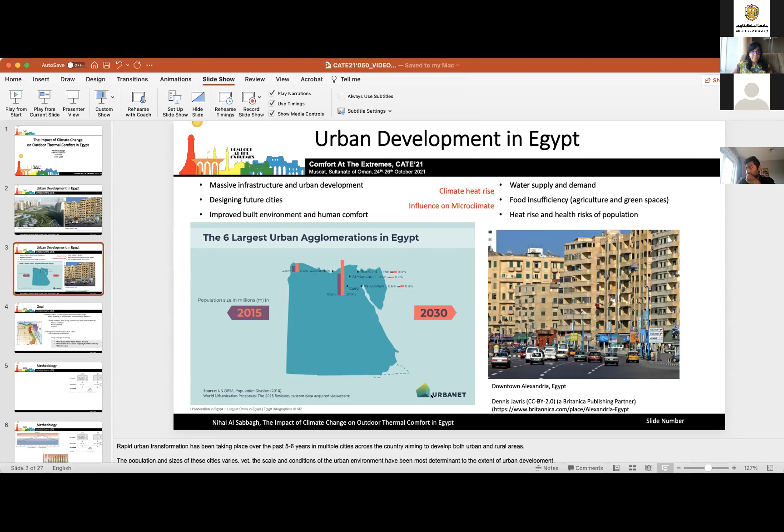Sorry for another interruption. Is it possible for the host to change the presentation, because it's stuck again, it's freezing. I cannot change anything. Now it's working, but I don't know why it freezes after you present the slides. Please start again, I hope this time it works. Thank you.

Again, through the methodology, the method looks into summarizing historical data sets and future data sets using two different methodologies, using those data sets for analysis of the climatic overview of those cities, then viewing that climatic overview through the lens of thermal comfort.

The main focus of this paper is to analyze climate and climate changes through the thermal comfort aspect, bridging the idea of using thermal comfort as an index inside urban environments, microclimatic conditions, inside buildings and outdoor environments, to the more global part of analyzing weather data sets.

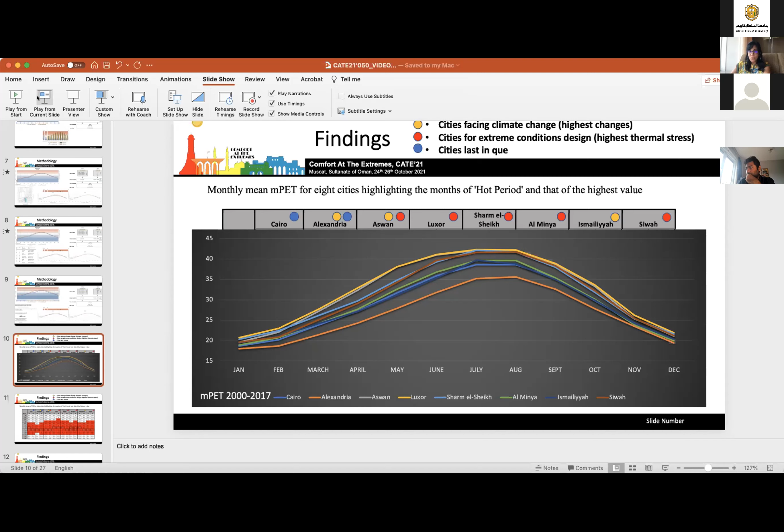Is the slide moving now? No, it doesn't move - I guess their presentation time is finished. If you could kindly give a few more minutes for that. Yeah, only one minute, I will try to manage. You have to try to manage because the next presentation will start exactly after you. Okay.

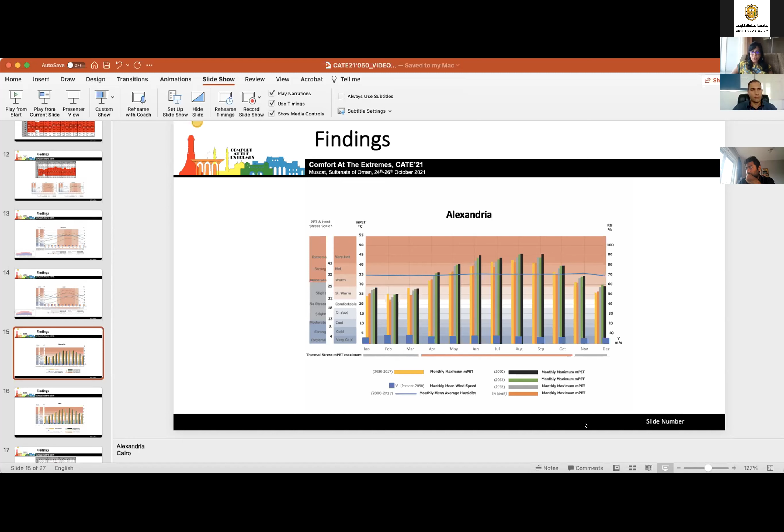I will jump into the future scenario for the city of Alexandria, showing the predicted heat stress level expected to rise in July and August. You can see the present scenario and the future scenario - it's reaching more than 45 degrees Celsius in June by 2090, and by 2035 you can see an increase of more than 2.4 degrees Celsius.

The city of Cairo is less vulnerable compared to Alexandria, though Alexandria has had milder, more pleasant conditions. The other three cities have been categorized together: Siwa, Ismailia, and Al-Minya, moving to the different categorized climatic zones according to the heat risk and heat stress levels.

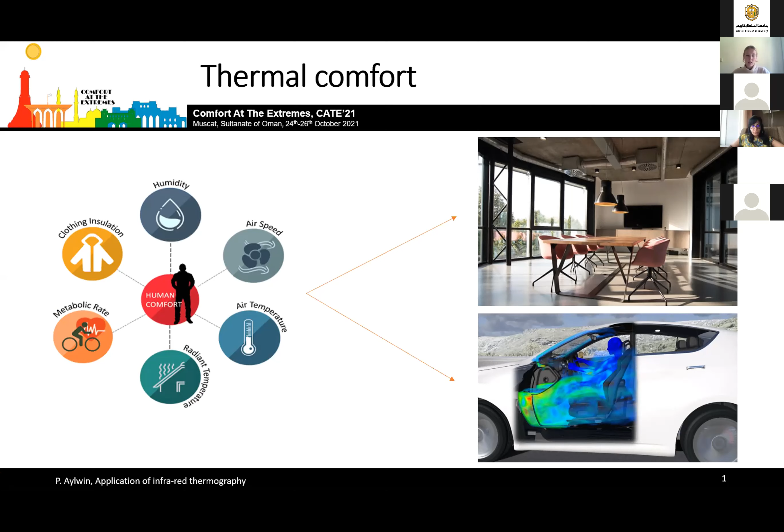Thermal comfort is dependent on numerous factors, and by understanding the integration of these factors into a single state, we can use this to inform the design of indoor or automotive environments with air conditioning or heating systems. Specifically, skin temperature plays a crucial role in a person's perception of thermal comfort, and whilst the exact relationship is complex, evaluating skin temperature distributions can serve as a valuable indicator.

Skin temperature is currently often measured with thermistors or thermocouples. However, these suffer some limitations depending on the application - for example, interference caused by the contact sensor itself or the attachment method, altering local heat transfer. Some are wired, which inhibits use during movement. Others don't allow access to data in real time. And importantly, all of them only cover a very small body surface area.

So an alternative method is to use infrared thermography, which is beneficial particularly in this area of research as it's non-contact, non-invasive, and portable, providing a more feasible field-based measurement.

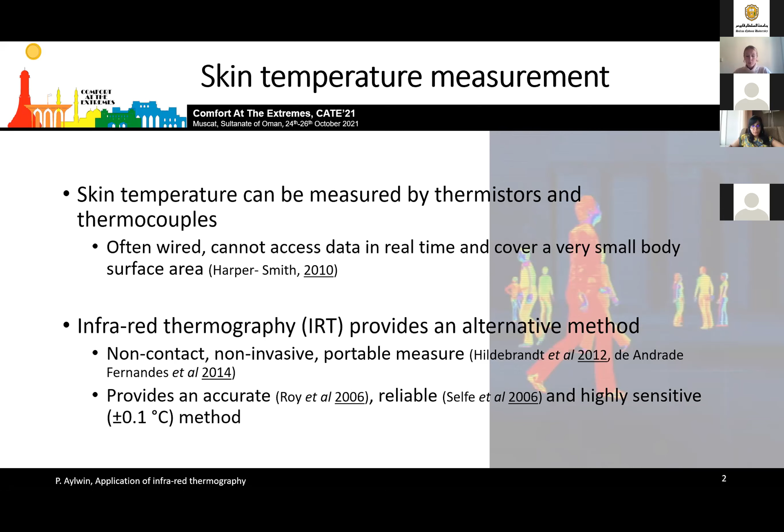Automatic detection with infrared thermography already exists and is helpful for measuring skin temperatures in large groups. However, the accuracy of these measurements does need to be evaluated.

Although these automatic systems have been heavily developed recently for purposes such as COVID-19 detection in airports, they would also potentially provide a valuable tool for those interested in thermal comfort, especially if we wanted to look at people in offices or museums and galleries where we've got large groups of people moving through an open plan space, as this would allow us to make real-time measurements and then be able to alter our environment as well.

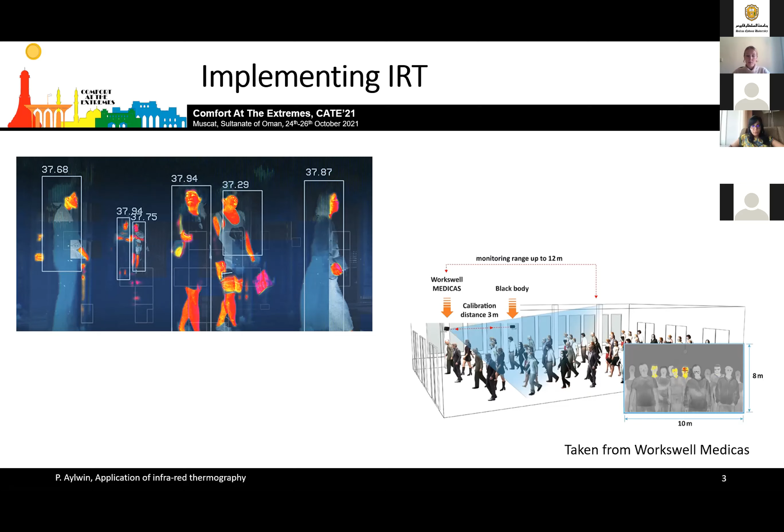The problem, however, is that historical standardization of the method of infrared thermography has actually limited its use in the field. So we need to assess how moving subjects with limited exposed skin surface areas, in uncontrolled or changing environmental conditions, may influence the measurements.

The aim of our study was to determine whether we could use infrared cameras to image and collect skin temperature measurements of people during movement, and whether this would vary by the camera type selected depending on the response, integration and capture times of the camera.

We also wanted to look at how sensitive our mean skin temperatures are to any missing values, to the size of the region of interest that we place during the analysis, and also the sensitivity to any deviations in input parameters, which would include the skin emissivity, the reflected temperature, air temperature, relative humidity, and object distance.

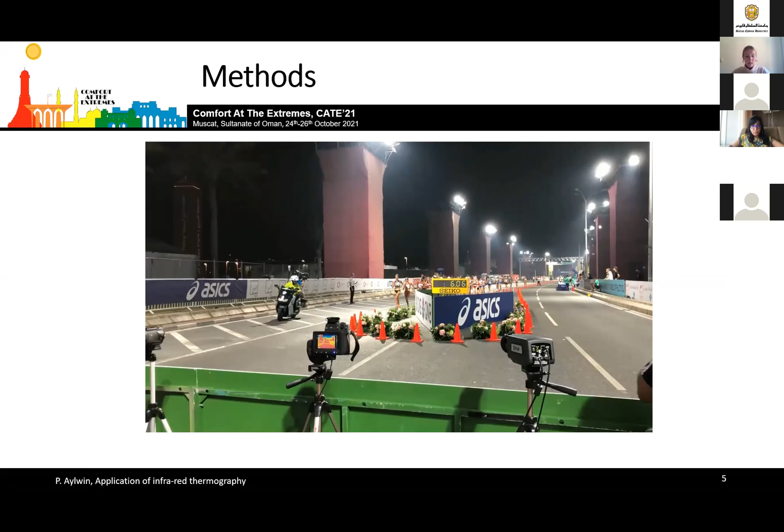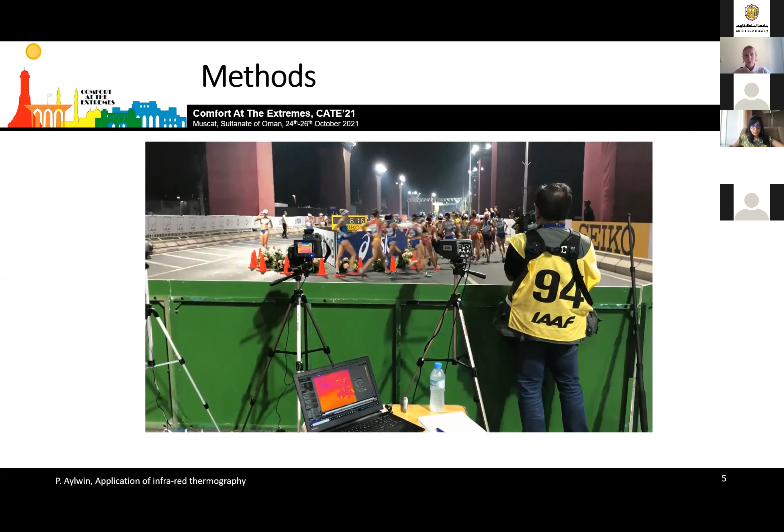So how did we do this? Well, infrared and standard video were collected during the 2019 World Athletics Championships in Doha for the women's 20-kilometer race walk, and 18 athletes were analysed.

A FLIR medium wave camera and long wave camera were placed on the U-turn of the track in order to allow us to take measurements of the anterior, lateral and posterior aspects of athletes.

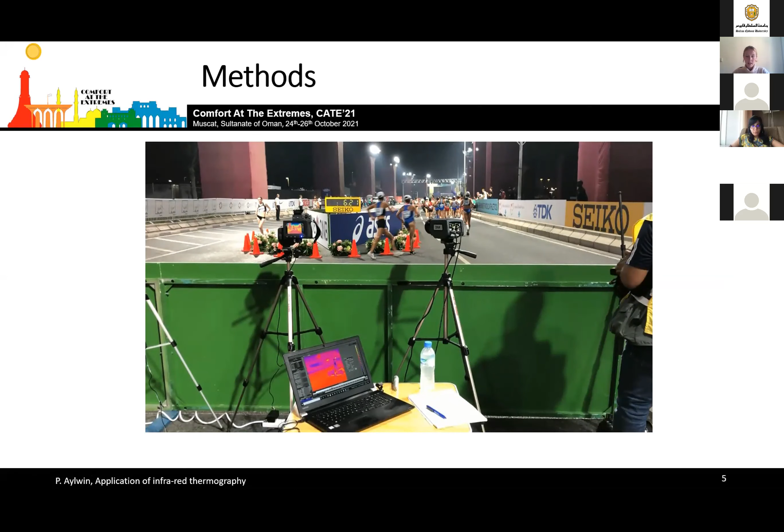Both cameras were mounted and stabilised for a period of 45 minutes prior to the race, and a black and aluminium reference plate was positioned to the side of the track for subsequent measurements of the reflected temperature and accuracy.

Regions of interest were manually selected in FLIR Research IR software for laps 1, 5, 10, 15 and 20. The mean environmental conditions over the duration of the race were 31.6 degrees Celsius air temperature, 76% relative humidity, 0.3 meters per second air velocity, and 29 degrees Celsius WBGT.

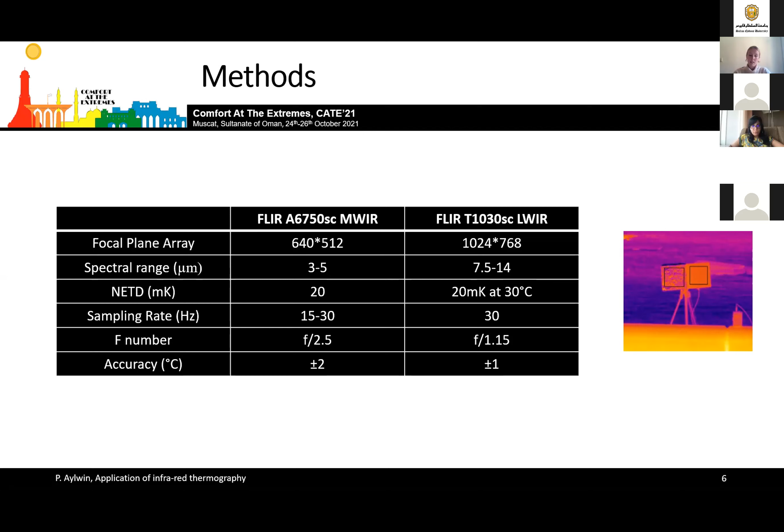We found blurring to be primarily an issue on the leg, affecting images taken when moving laterally through the field of view, and more so for the long wave camera. Blurring is an issue because our measurements can become both a background and a skin temperature measurement.

To explain that a bit further, in order to get a valid temperature measurement, the object you're trying to image must remain on the pixel of the sensor matrix for a sufficient amount of time. In this scenario, the average athlete was moving at approximately 3.5 meters per second, or about 3 steps per second.

This would equate for the long wave camera to a single leg moving 630 pixels per second. This means that in the exposure time of that camera, which was 30 milliseconds, the leg is moving over 19 pixels. Given that the average leg was about 12 pixels wide, this means that at one point in the exposure, 7 pixels are actually a background measurement and not the leg for the whole exposure.

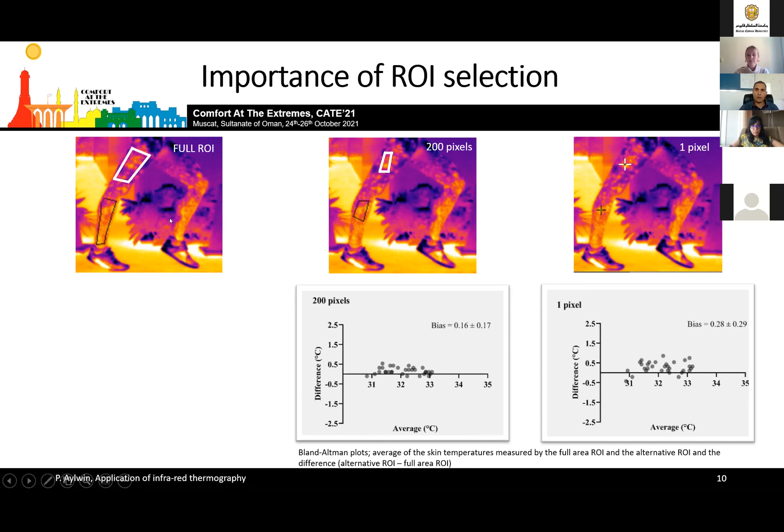Additionally, the variation between anterior, lateral and posterior measurements was investigated, and we found that anterior and lateral, and anterior and posterior measurements were significantly different from each other.

So when we combine that all together and compare it with some protocols that aim to standardize how people place regions of interest, we need to consider that any reduction in the surface area is a loss of temperature data points. This highlights that we want the greatest number of pixels within our measurements, and also the highest resolution of the camera possible.

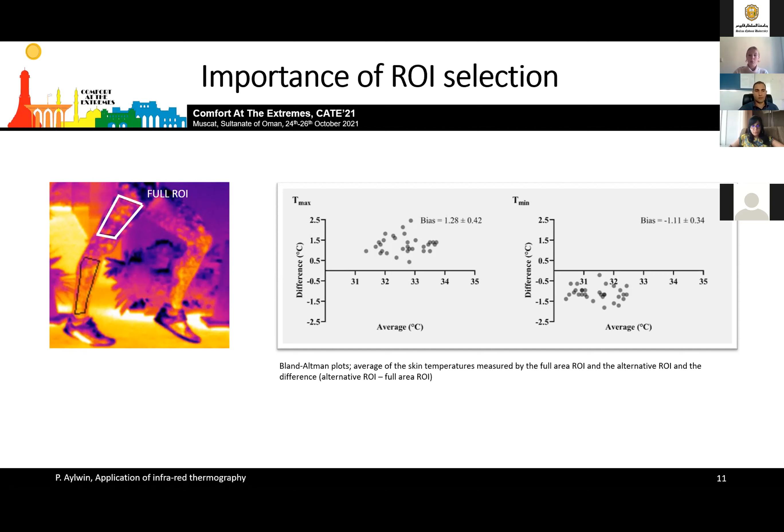Finally, for accurate analysis, the following parameters are required by the post-processing software or the camera itself, including object emissivity, object distance, reflected temperature, air temperature, and relative humidity.

Unfortunately, when we use these methods in the field, it's not possible to control these factors as accurately as we can in the laboratory, and we may have errors from not being able to make continuous measurements, or in this case, we couldn't place the measurements exactly where athletes were at all times. So we looked at how sensitive the measurement was to deviations in these parameters.

We found that a change in emissivity from 0.98, which is commonly used, to 0.91 will alter the skin temperature measured by 0.07 degrees Celsius per 1 degree Celsius difference between reflected and object temperatures.

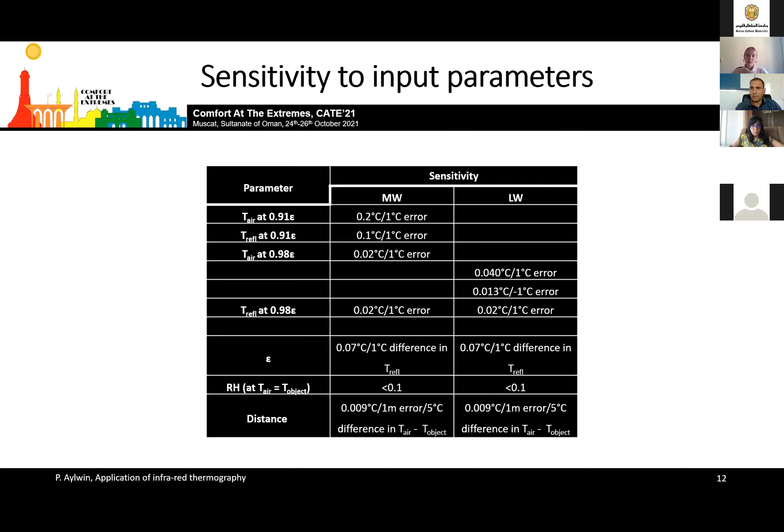Sensitivity to relative humidity and distance were both small and dependent on air, but not reflected, temperatures, with less than a 0.1 degree Celsius deviation introduced by a plus or minus 5% change in relative humidity, or a 4 meter change in distance. So, am I okay to go on?

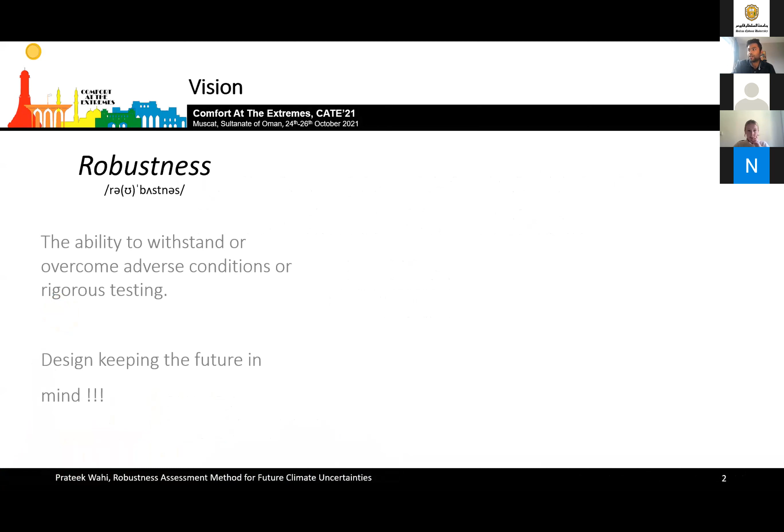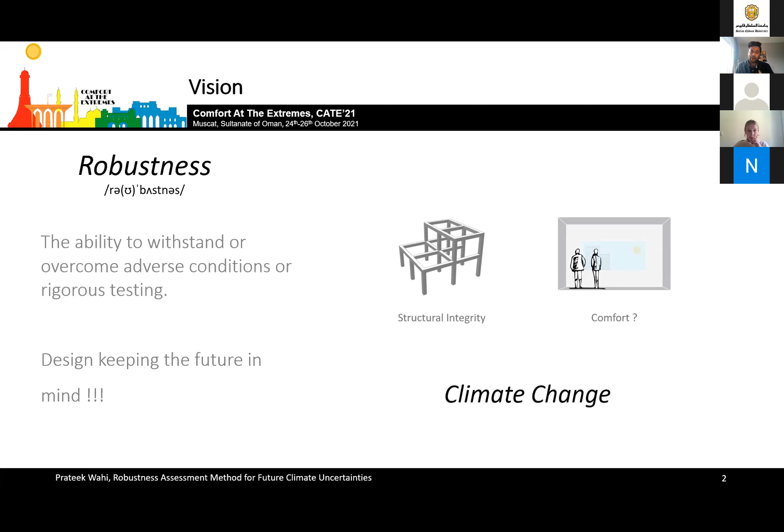So let's begin. Robustness as a concept is about the ability to withstand or overcome adverse conditions, or basically it's about designing with the future in mind. Now we design our buildings structurally to be robust so they stand for the next 30 to 50 years or probably even more. But what about comfort? We should also include the robustness of comfort within our design process, especially when we are on the verge of climate change.

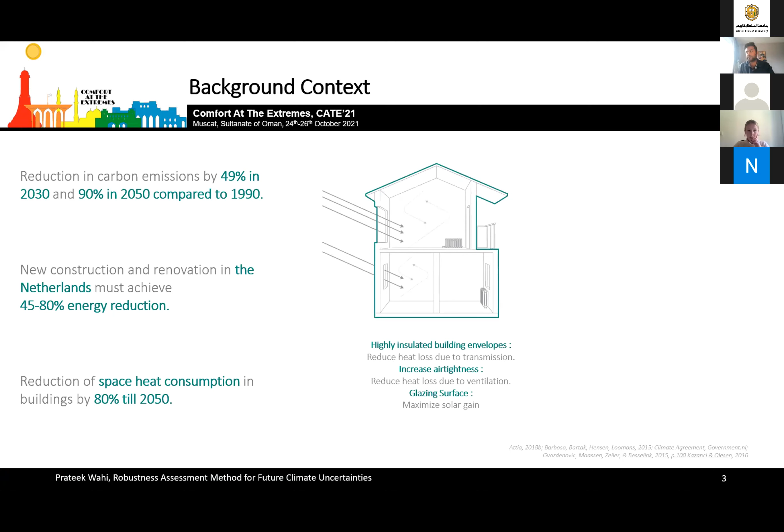Now, in the context of the Netherlands as compared to other European countries, the Netherlands wants to reduce carbon emissions to reduce their impact on climate change. For that, they want new construction or renovation to focus on energy reduction, and a large part of this focuses on reducing space heating consumption. The primary design strategies to reduce heating demand focus on a highly insulated building envelope, increasing airtightness, or increasing glazing surfaces to maximize solar gain.

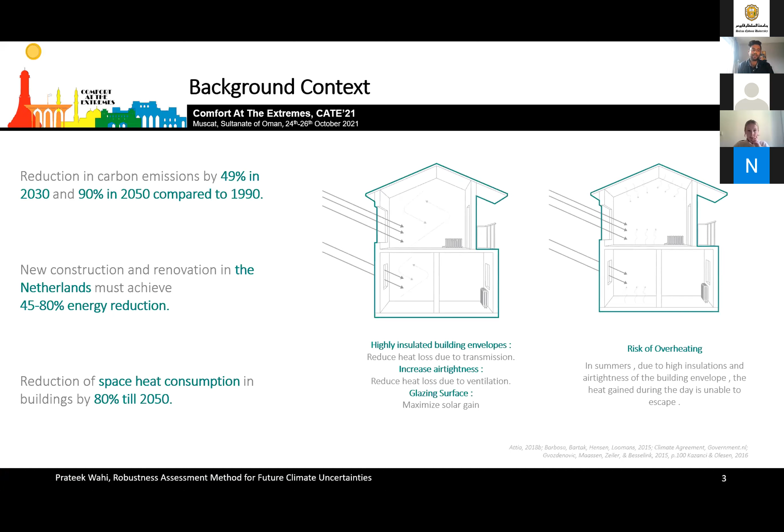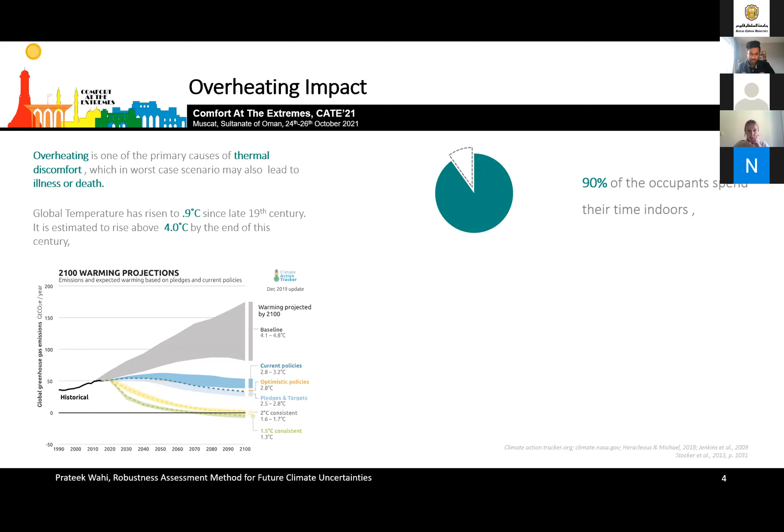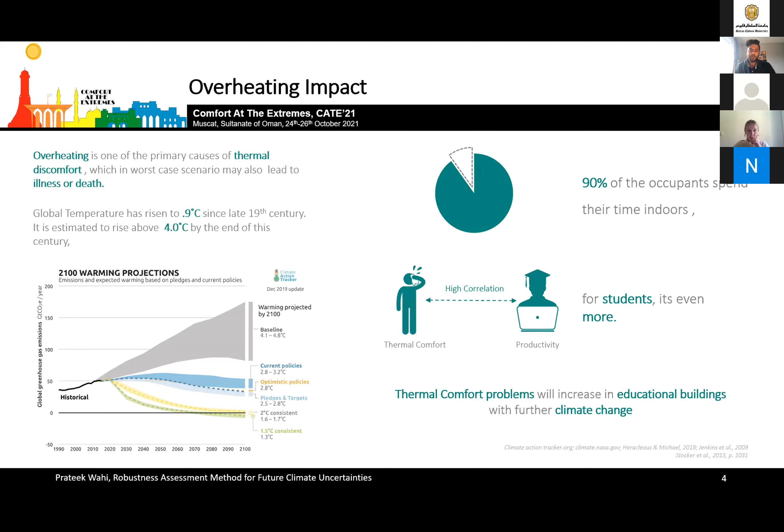But in summer, these highly insulated envelopes actually act like a greenhouse effect, causing the risk of overheating. Overheating is one of the primary causes of thermal discomfort, and as global temperature rises, this will eventually become a very difficult problem in the future. We need to look into this because as occupants we spend 90% of our time indoors, and for students it's even more. Various studies have found a correlation between thermal comfort and productivity, and it's quite possible that thermal comfort problems will only increase in educational buildings with further climate change.

But then how do you reduce overheating? Well, we know of active and passive measures, which use different technologies or designs to balance the heat balance of the building. However, climate change has a dynamic nature, so strategies should be adaptive to this dynamic nature while also being energy efficient. Passive strategies provide opportunities to interact and adapt to external climate.

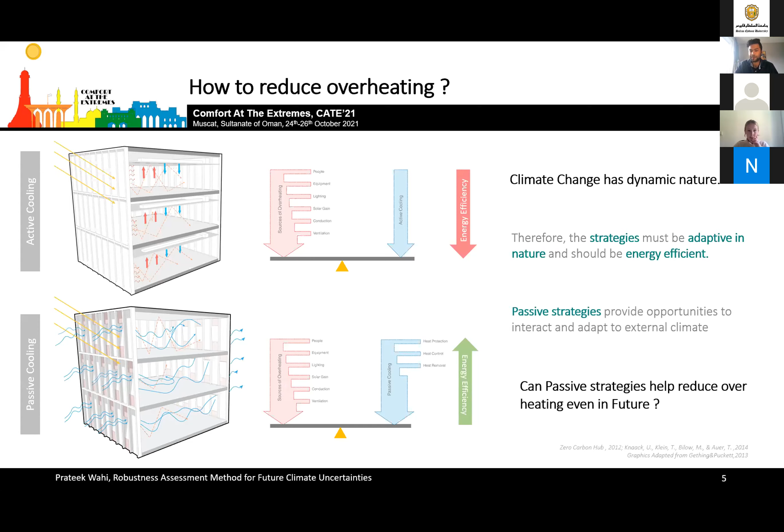But the main question is whether passive strategies can still help reduce the problem of overheating or achieve thermal comfort in the future. Therefore, the primary focus of my study was to assess the robustness or future-proofness of passive design strategies to mitigate the risk of overheating in future climate scenarios, specifically 2050 and 2085. The boundary conditions I took for this research are that I'm only looking at outdoor temperature change as an indicator of climate change, and I'm focusing on energy efficient school buildings.

In terms of design strategies, my focus is primarily on the building envelope because it can accentuate the risk of overheating. So I looked into passive strategies applicable at the building envelope in temperate climates, given the context of the Netherlands.

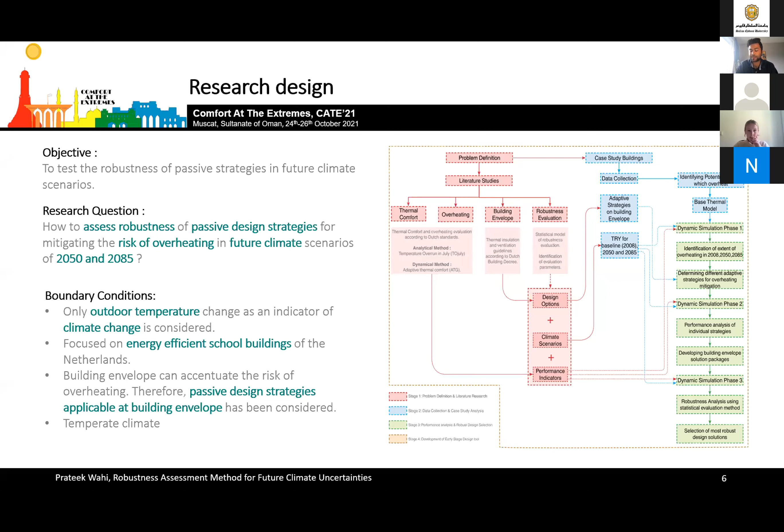To begin with, I selected a few case studies so that I could apply the methodology developed to analyze robustness. I looked into two different types of buildings, probably towards the extremes. One is the Pulse building on the TU Delft campus, which is a highly energy efficient, nearly zero energy building. It's mechanically controlled.

The other one is the Melanchthon school, a secondary school in Rotterdam, also in the Netherlands, and it's naturally ventilated. If you compare these two schools, the Pulse building has quite high insulation based on passive design or passive house standards, while the Melanchthon school also has high insulation, but not as high as the Pulse building. So these two case studies gave a good idea about what passive strategies can really do in these two extremes of educational buildings.

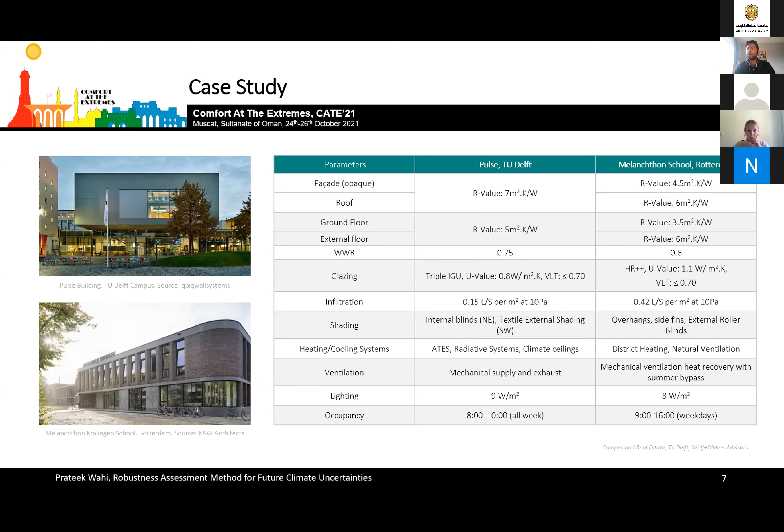So the next step was to identify spaces with overheating risk. I did extensive literature review, and found that generally overheating happens in teaching spaces, of course, because of high internal loads.

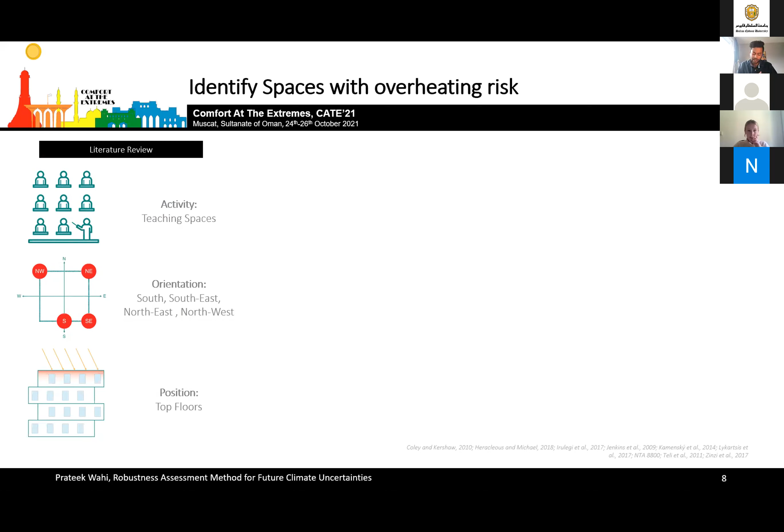Within orientation, south, southeast, northeast, and northwest have the highest possibilities of overheating. And generally spaces on the top floor have the highest probability of overheating because of heat gain via the sun, through facades and roof both.

So first I looked into these spaces. I identified these spaces in both the case studies, and then I identified 7 spaces in the Pulse building and 3 spaces in the school building, which may have a possibility of overheating.

Now, to reduce the computational time to dynamically analyze these buildings, we started looking at an analytical method, which is temperature overrun in the month of July, suggested by the Dutch standards. It's a static heat balance method which tells you whether your space has a risk of overheating or not. So we applied this method on these 10 spaces.

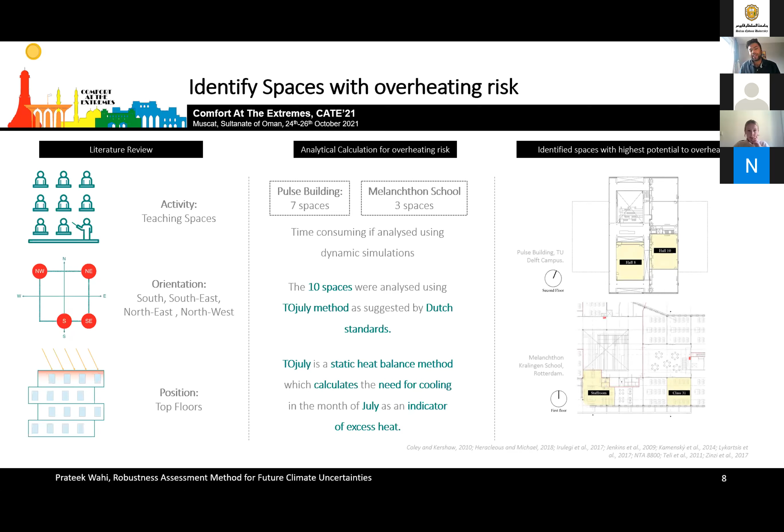After the application, we found 2 spaces in each of the case studies which have the highest potential to overheat. After that, we simulated these specific spaces in each building via dynamic simulation, using Energy Plus and Design Builder.

So what it does is set a limit: only 10% of the occupied hours can be accepted as thermally discomfort. According to ISO 7730 for educational buildings, it has to comply with Class B, which says the percentage dissatisfied is only 10%.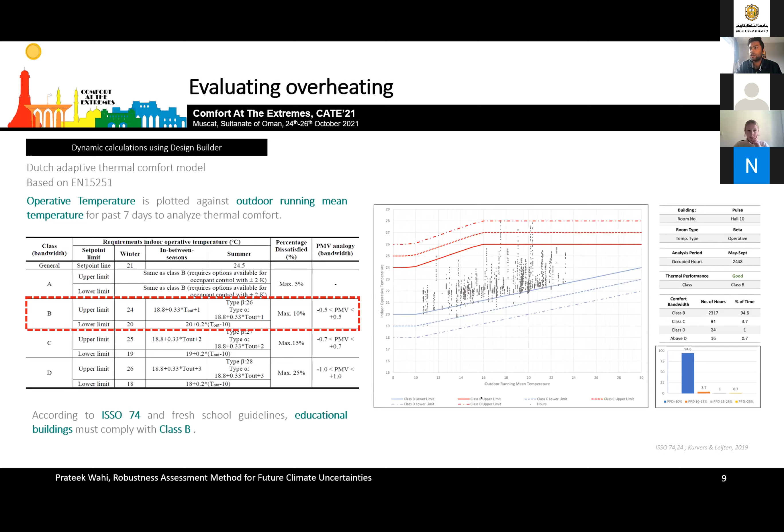So what does it mean? If we look at this chart, the percentage of discomfort hours, which I calculated via the simulation software, the 10% band is what is acceptable as comfortable, and anything above in the red band is the discomfort hours.

So first I analyzed the baseline 2008 test reference year, and we can see that all the identified spaces in both case studies are more or less comfortable because they fall within the blue band. But in 2050, the percentage of discomfort hours due to summer overheating increases quite a lot. And in 2085, it becomes even worse.

To understand this graph: if you have occupied 100 hours in a space, in 2008 only 7 hours are uncomfortable. In 2050, around 18 hours would be uncomfortable. And in 2085, around 30 hours would be uncomfortable due to summer overheating.

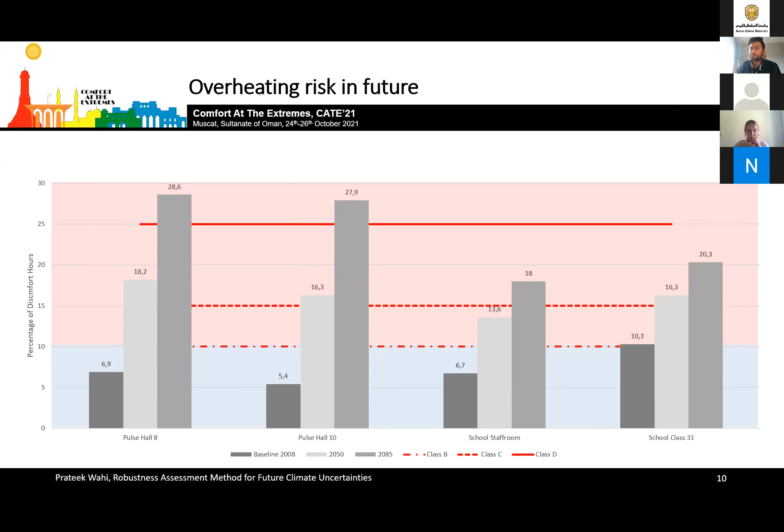So then the next aspect was: what are the solutions we could apply to reduce this overheating? The strategies applied on the building envelope can be divided into those focusing on heat protection, control, and removal. So I made a map for integrating these passive design strategies at the design level, pre-design stage, conceptual design stage, and system design stage.

These strategies are further divided by the objective of the strategy, where you are applying that strategy, and what the strategy exactly is. I also developed a map for architects or designers to use, showing where and when you can apply these kinds of strategies.

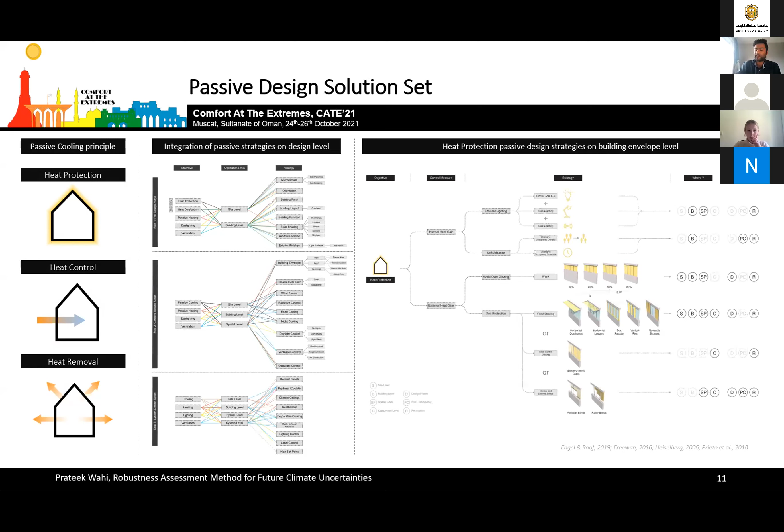So on the rightmost part of the slide, you can see that heat protection has these kinds of strategies available to be applied on the building envelope. Similarly, heat control and heat removal have these kinds of strategies that can be applied on the building envelope.

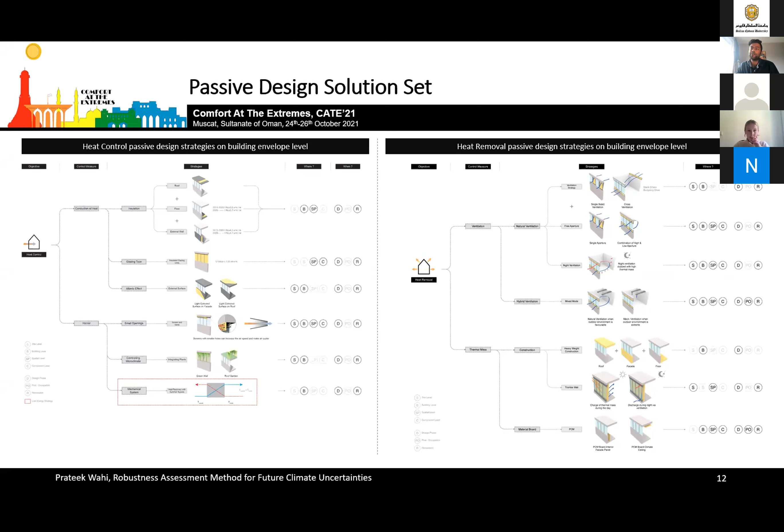Now I looked at all these strategies applied individually in the dynamic simulation first, to see which strategy has the highest impact in reducing overheating. Then finally I combined certain strategies together which had the highest impact, to see their combined effect. These were the combinations of strategies which I finally applied on both case studies.

Now, how do you assess the robustness of these strategies? A robust design is a design with minimum performance variability under the presence of uncertainties. But let's break down this definition.

By design, I mean the solution sets, which are the applicable passive design strategies I showed you before. We apply it using the building performance simulation, and we have to see the overheating hours as the performance indicator. That is what we need to minimize in terms of performance variability under the presence of the uncertainties of climate change, for the worst case scenarios of 2050 and 2085.

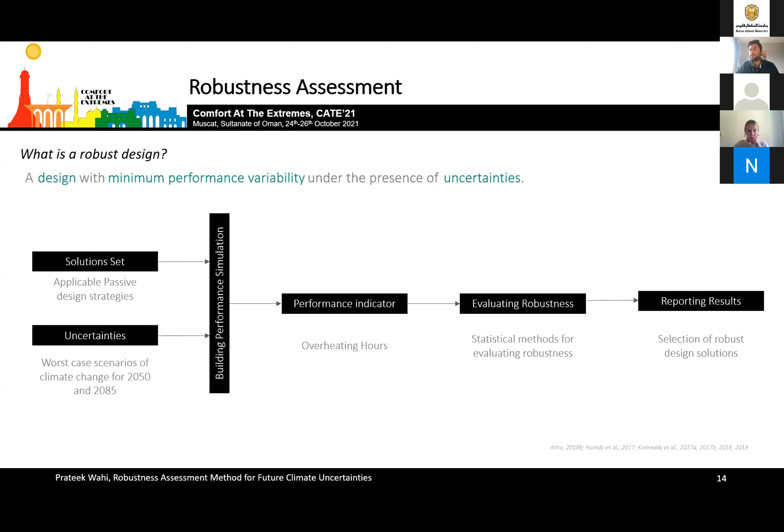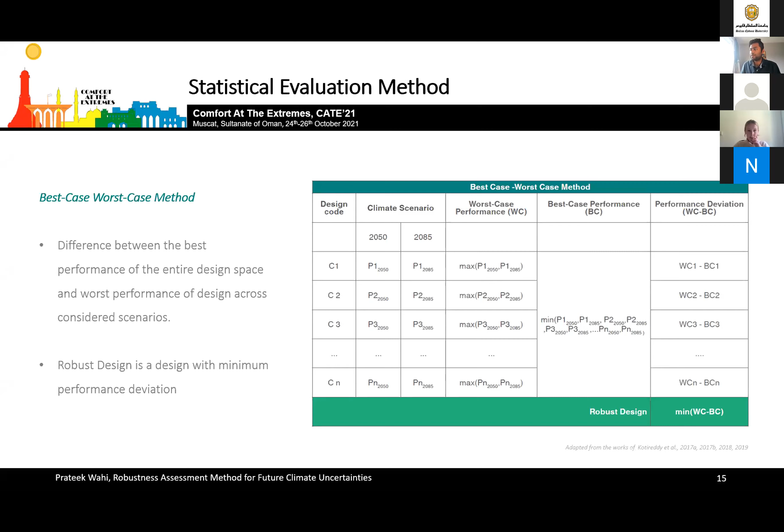Once we have all the performances ready, we evaluate robustness using the statistical method of best case, worst case scenario, and then we report the results. This best case, worst case scenario is basically the difference between the best performance of the entire design space and the worst performance across all the considered scenarios. We need to reduce the minimum performance deviation. So the robust design would be the minimum performance between the worst case and the best case of all the designs together.

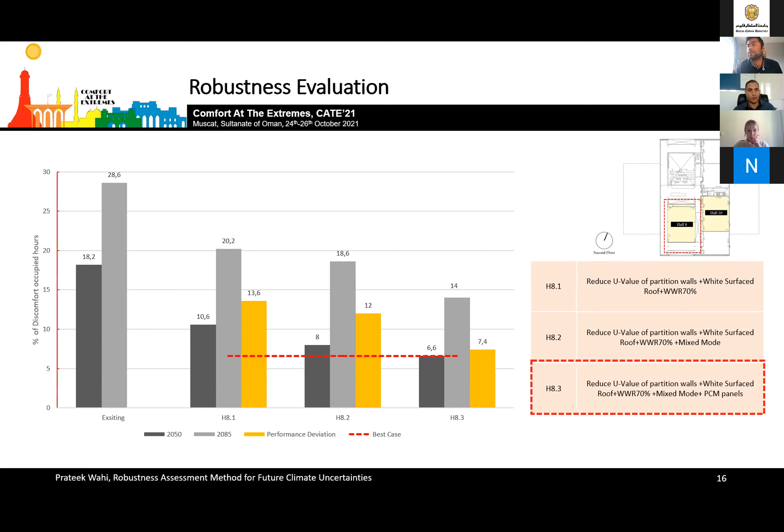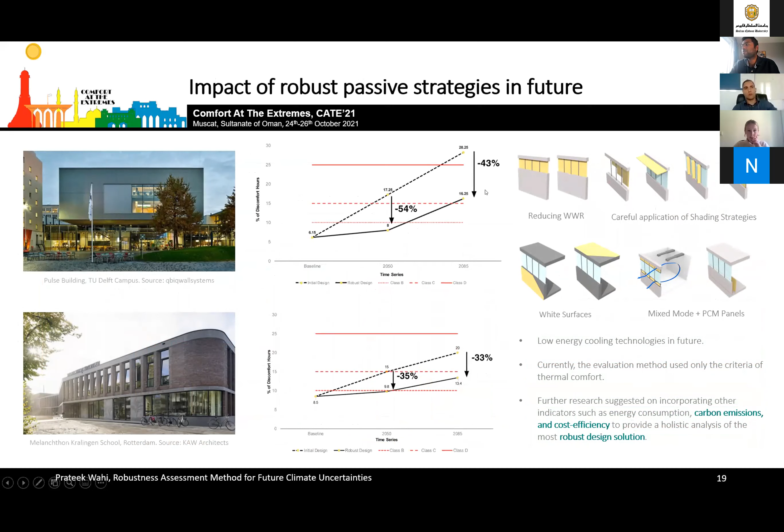So I'm going to go quickly. We applied this strategy, this method, on all the spaces identified. What we found was that the robust design strategies identified from the method were quite helpful, because they could reduce around 54 to 43% of discomfort hours in the future.

But then that's not enough. We have to help architects or designers to also use robustness evaluation in the design process. So as an extension of my studies, I also developed a simple Excel tool, which is analytical based. If you're really interested in looking into the tool, you can scan this QR code, and it will take you to a live preview of the tool.

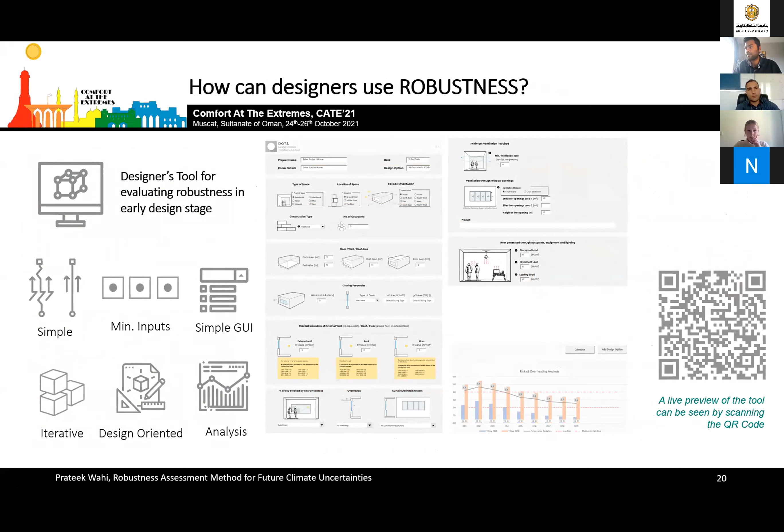Finally, I would like to conclude that we shape our buildings, thereafter they shape us. It's a famous quote by Winston Churchill, but what I say is that we shape the climate, therefore the climate will shape us now. Thank you for your attention, and I look forward to your questions.

Thank you so much for your time scheduling. Also your presentation was great, it's great, at least to me. I checked your app yesterday night using your QR code. I really like it, because some students and I work on app design with MATLAB. I don't know if you developed your app with MATLAB or not, but I really like your presentation. No, okay, we don't have time. Thank you for your presentation. We can go to the last presentation, and after that we have 15 minutes for questions.

Good afternoon. It's my pleasure to present on behalf of my colleague Georgios Gourlis and myself the design and the nowadays operational details and the future of our pavilion at the Expo 2020 in Dubai. Dubai, not more than 500 kilometers northwest of Oman, is now hosting the world's Expo. It's called 2020 because of Corona issues; it was delayed, and now it started on October 1st. Austria is one of 192 countries that have a pavilion there, to show the country, and it's financed by the Chamber of Economics. So they want to show what they can do as a country, not least in economic affairs.

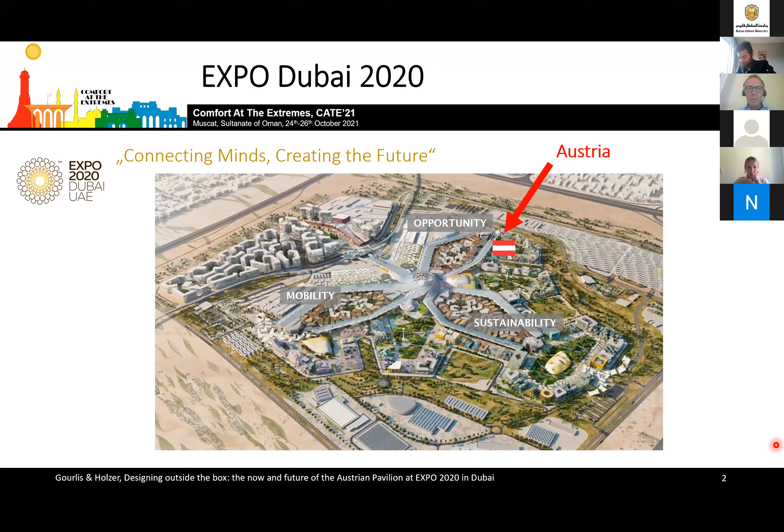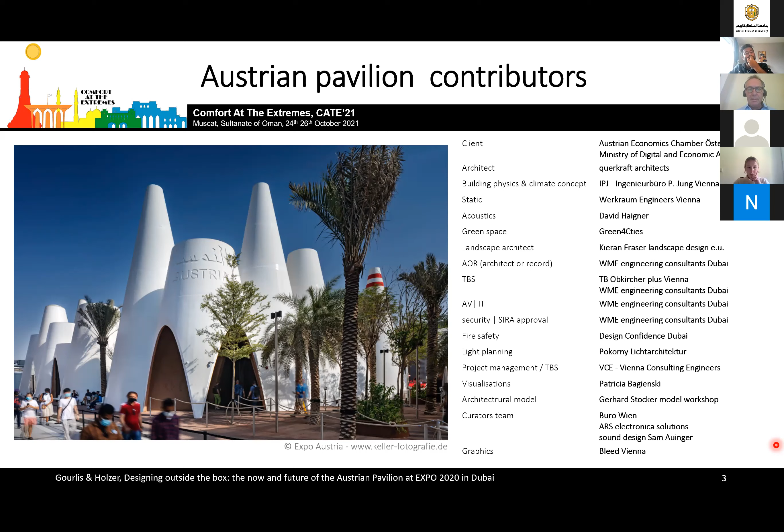This is the Austrian pavilion. It looks very different, but it's not about looking different, it's about making a difference. We had the honor as climate engineers and building physicists, together with a general designer, the architectural office of Querkraft. Together with a bundle of special engineers and consultants, we won an exhibition within Austria. There was an architectural exhibition on who should build this pavilion, and Querkraft won. They are very professional, very enthusiastic, and very crazy in the best meaning of the word, as architects. They really like to bring things down to the extremes in terms of simplicity, and I like this approach very much. So this is the pavilion, and these are the people who worked on it.

You see, it's really a different look-alike, surrounded by technical boxes of other pavilions. It serves a gross floor area of 1,260 square meters, with the uses of exhibition and innovation lab, which is a special area in the exhibition.

Excuse me, I set my clock to be on time. Now it runs.

Cafe, a VIP lounge, and office and service areas. It will be in service for half a year, having started now 2 weeks ago, and it will be open 12 hours a day. The construction idea is like this.

It's made of a number of 38 cones. Originally, they were planned to be made of loam for the temporary aspect of the building, which would have fit very well to make them and release them to the soil again. But the loam was unpayable, and it was not possible to get the permissions for the international standards and codes for safety reasons, etc. So the loam idea had to be left, and now they are of precast concrete with clay plaster inside.

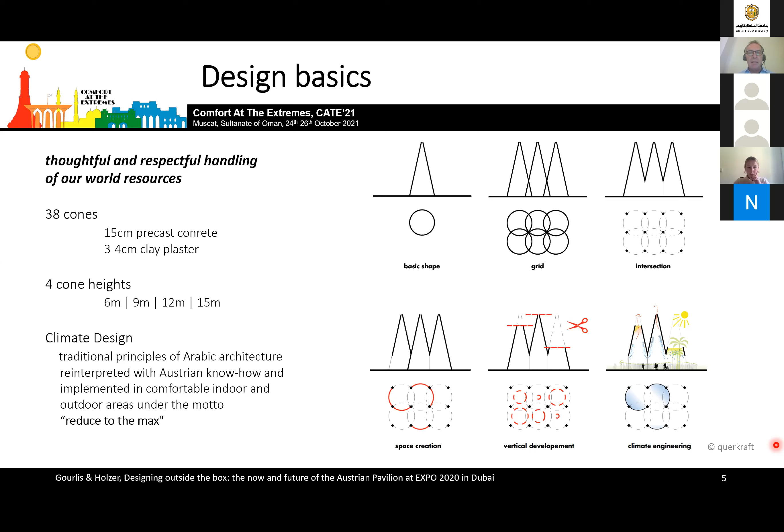The climate design idea is that really more than half of the building is purely free running mode, and the other half is mixed mode, hybrid mode, with a lot of passive means of climatization. The headline for the design was really 'reduced to the max.' We did a lot of headaches and calculations to really get things as simple as possible.

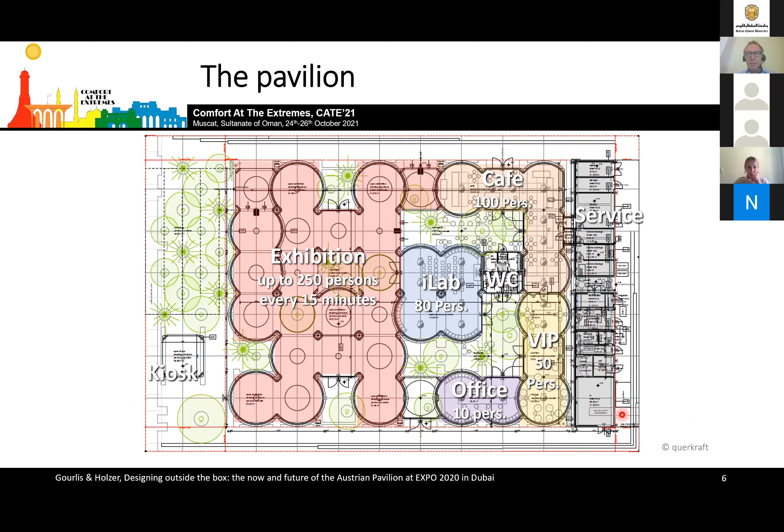This is the floor plan. You can see the exhibition area. It's free running mode, fully entering here, floating through the area, getting into the planted courtyard and getting out, or getting into the cafe. And there are the VIP and office area and the service area for storage and facilities.

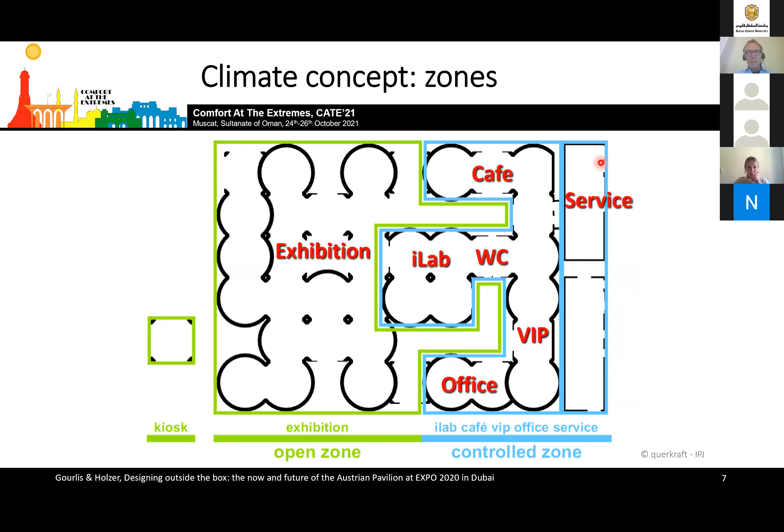In green, this is the free running area. In blue, this is the hybrid controlled area. Hybrid controlled means that during the night it's always free running. During the day, we decide upon the outside climate and the inside climate comparison.

If it's in the controlled mode, then the openings are closed at the top of those cones, the doors are closed, and means of comfort ventilation are introduced, so desk fans, ceiling fans and other things, and small fan coils will run. If the climate allows, the doors are open, the lids are opened, and it's free running mode.

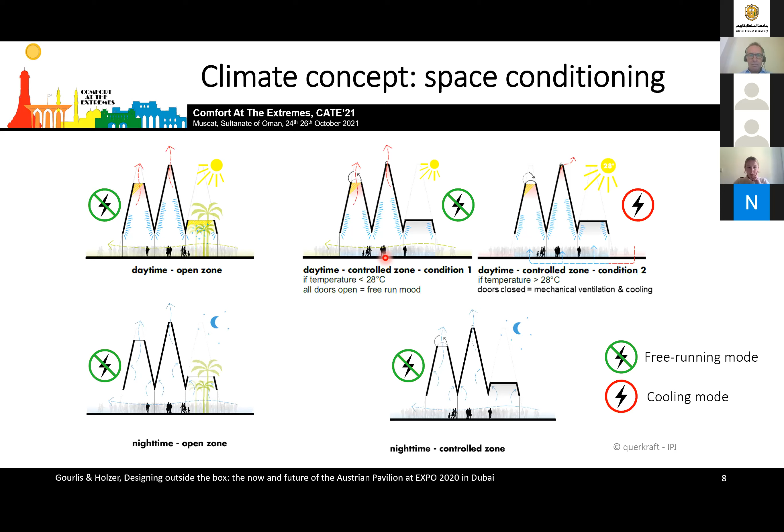We applied principles which are very common in Arabic traditional architecture, vernacular architecture. Many of them have been presented already in this wonderful conference. Many of them we learned from fruitful discussions with the scientists who invented adaptive comfort. So many thanks to Sue Roaf and Fergus Nicol and Michael Humphreys. We learned a lot from you.

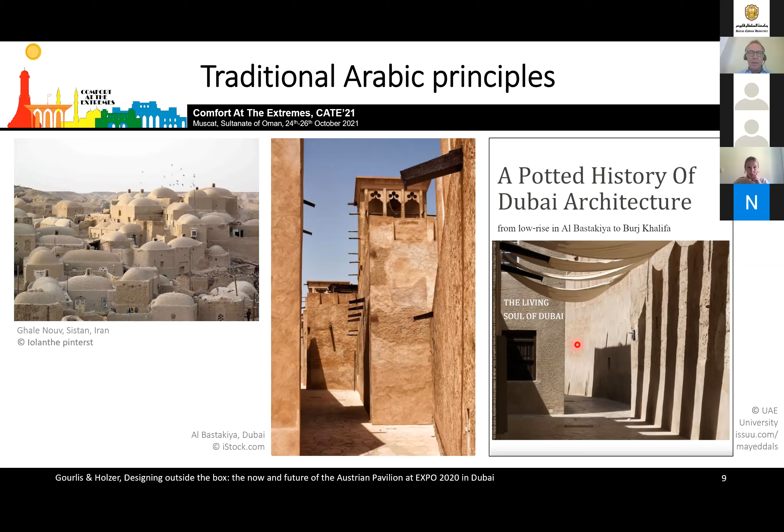The principles of domes enhancing stratification and buoyancy ventilation, the principle of wind towers enhancing the effect of natural ventilation by low or lee situations of the wind, and not at least the principle of having shaded courtyards with and without plants, with and without water. So these are our design principles we realized in the pavilion.

We applied reflective outer surface to have the sun mostly reflected. The shape of the cones themselves form a very well shaded area. And I loved the lecture, the keynote from Professor Knebel when he said light and air and no sun as a principle for the Arabic region.

We increased air movement due to the cones, which have stratification ventilation and work as solar chimneys, increasing the air movement downstairs, and a very open layout in the exhibition. And we increased the air movement by fans in the green courtyards and by open doors, which are covered with metal mesh, even open during the nights.

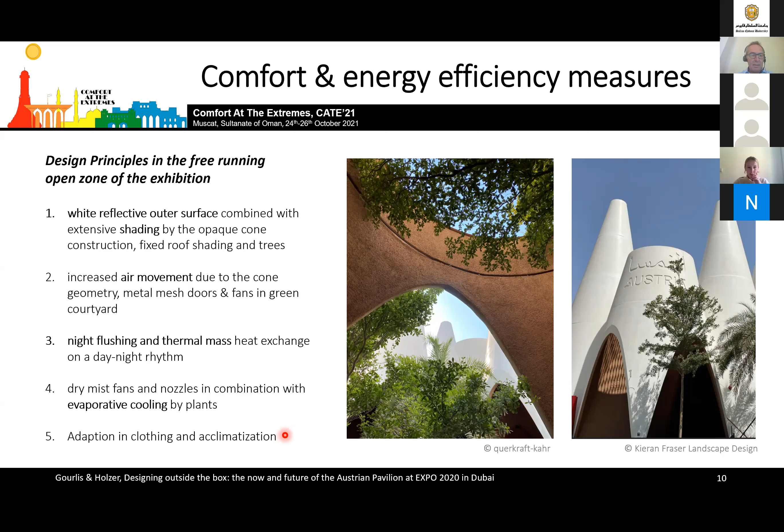We apply the principle of night flushing and thermal mass by these massive cones, and we add elements of adiabatic cooling in the courtyards. As has been said today already in some of the lectures, we use the principle of adaptive comfort, and we learned from Fergus Nicol this morning that the majority of adaptation is taking place in simply changing clothing, and I will come to that later.

Some images of the inside. This is the open, free running mode area of the exhibition, very much connected to the courtyard, sometimes shaded. The big openings are shaded. The small openings, which are 15 meters in height, are not shaded.

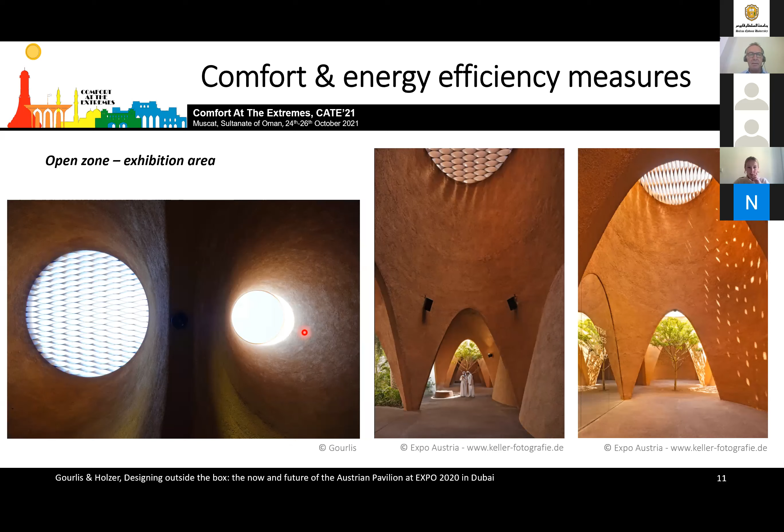Another image here, you see the small dry mist ventilators.

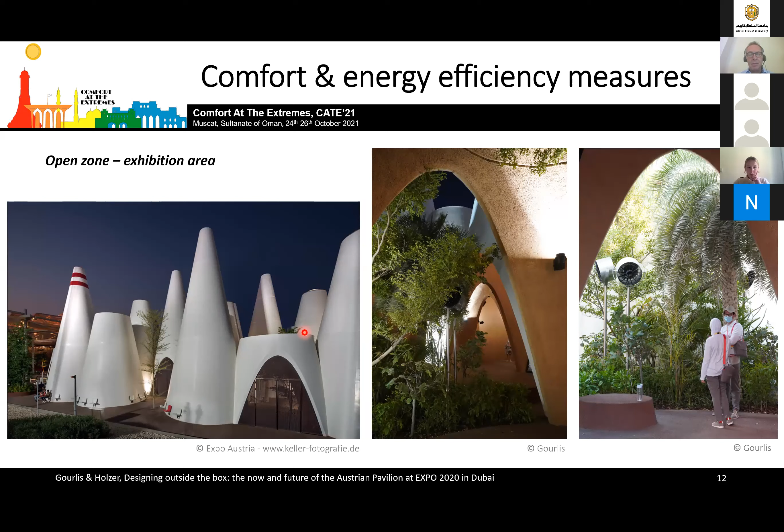We learned something about them. I will come to that later.

We have mechanically operable lids at the cones. So when we go for mechanical cooling, we close the cones, and go for preconditioned supply air in the controlled mode.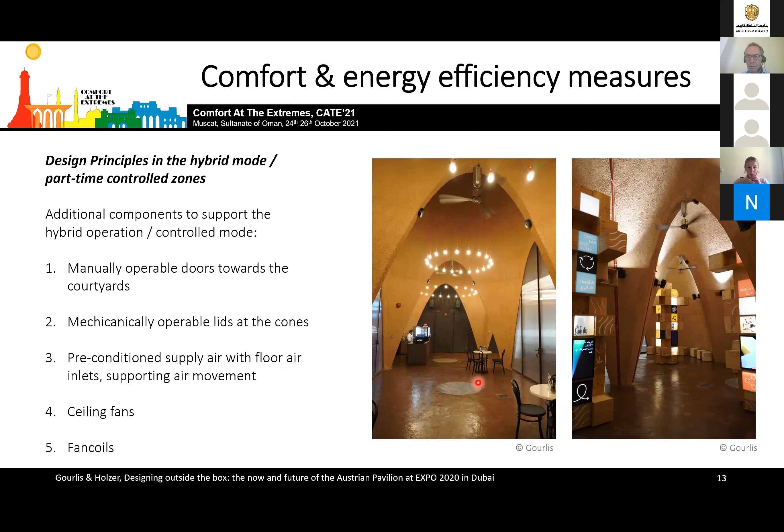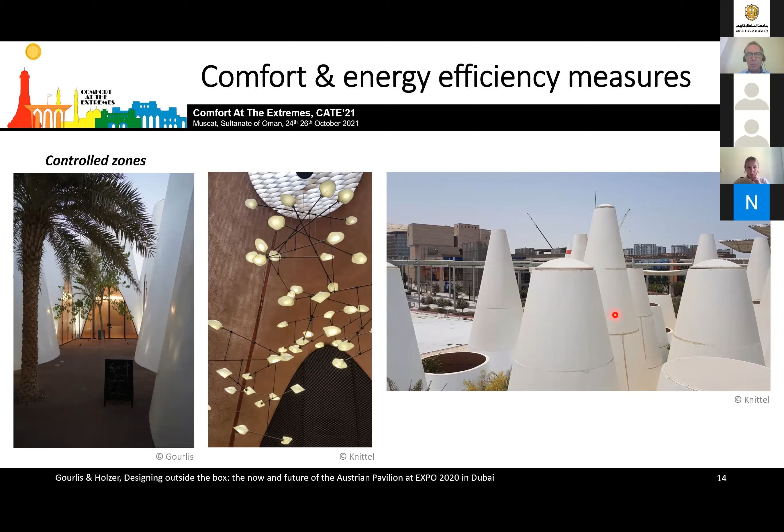A picture from the VIP area, and again a picture from these big doors in the open mode, opening to the controlled zones in the hybrid situation of free running mode.

The design looks easy, but it was heavily prepared by CFD calculations and building energy modeling. Here you see the wind distribution passing through the ground floor of the exhibition area.

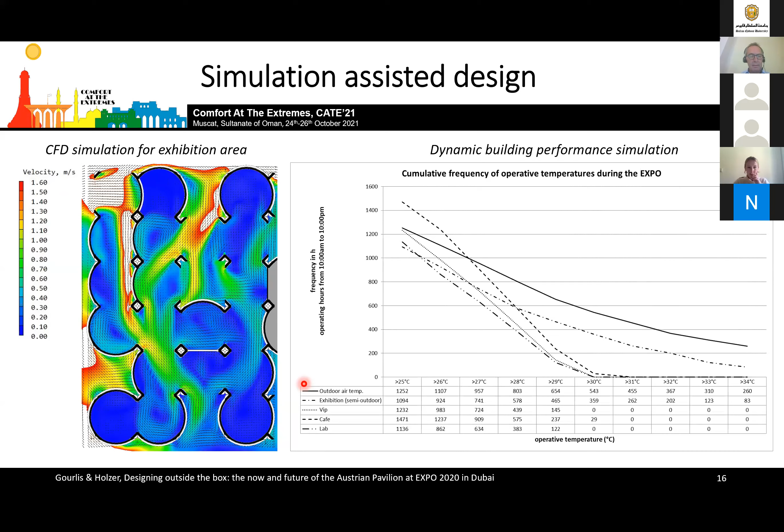You see a lot of statistics we did to convince our clients, and convincing the clients was a very important thing. You can imagine telling them that they will be happy with 30 degrees, and 32 degrees sometimes, is a brutal start in the beginning.

And all honor to our clients, they really listened, they really learned with us, and now I think in most cases they're very happy with the pavilion.

We had a brutal start. The pavilion was designed to start in mid of October, which in Dubai, as you can see at the edge here, is when the outdoor climate starts to get very well suited for night ventilation.

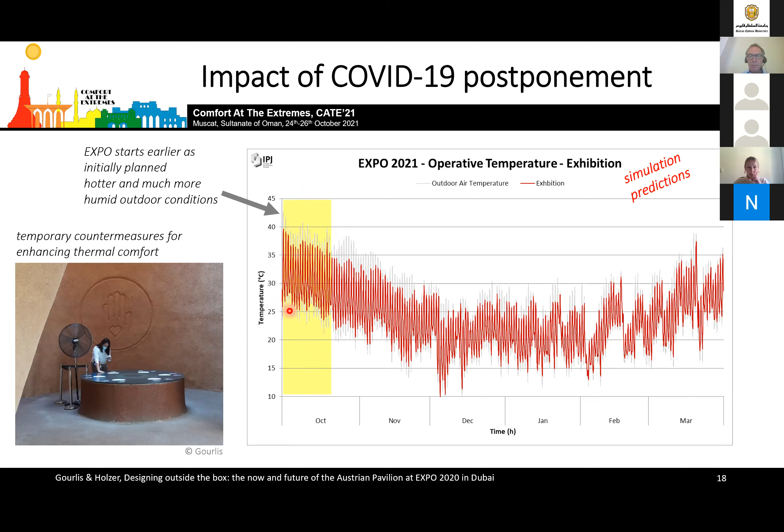But due to Corona aspects, they started half a month earlier, which is a significant difference statistically in Dubai, with night temperatures not falling below 25. In fact, October 21 was 2 weeks where the outdoor temperatures did not significantly fall lower than 30 degrees.

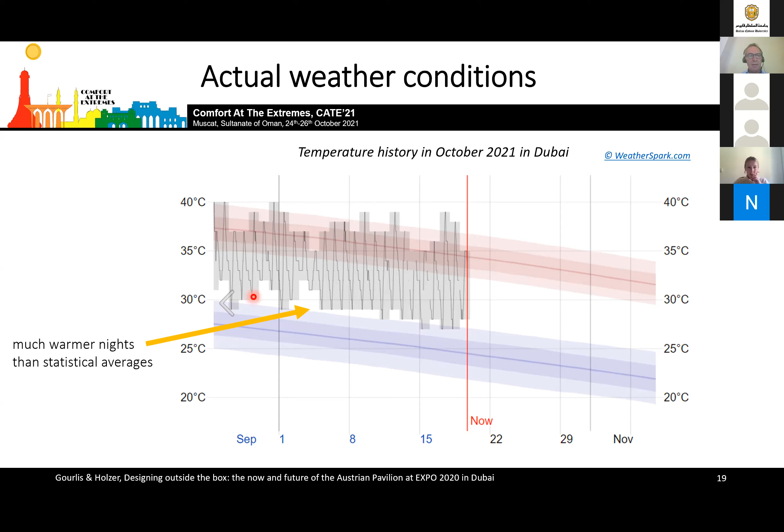So you can imagine this pavilion had a tough start. But after the first 2 weeks, these are graphs from just 1 week ago. We are very proud that the indoor temperature in red is significantly lower than the outdoor temperature in gray. So the principle really works.

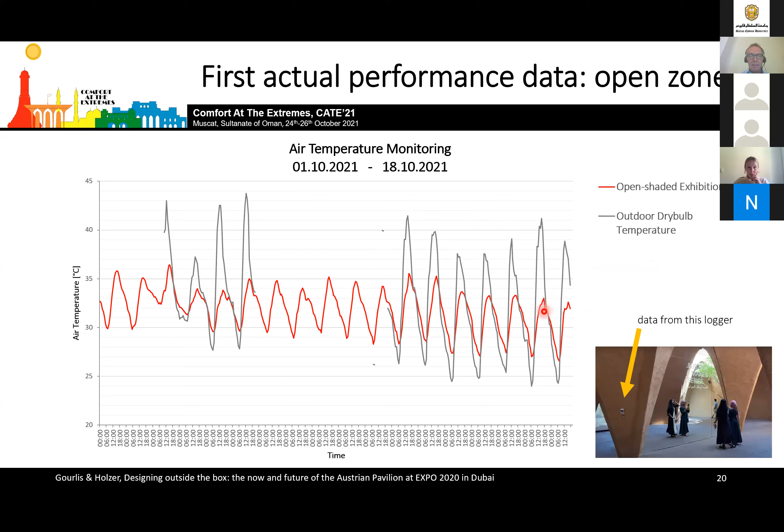That is the free running mode area with 5 and 7 degrees less inside than outside. So we're very happy that the prognosis and the design issues really proved out.

We have been very happy with the CBE thermal comfort tool. Many of you might know it. It's a very handy means of visualization of comfort, of prediction of comfort zones, including wind, including many aspects of adaptive measures. It helped us a lot to visualize and justify what we do, and it helped us in discussing comfort issues with our clients.

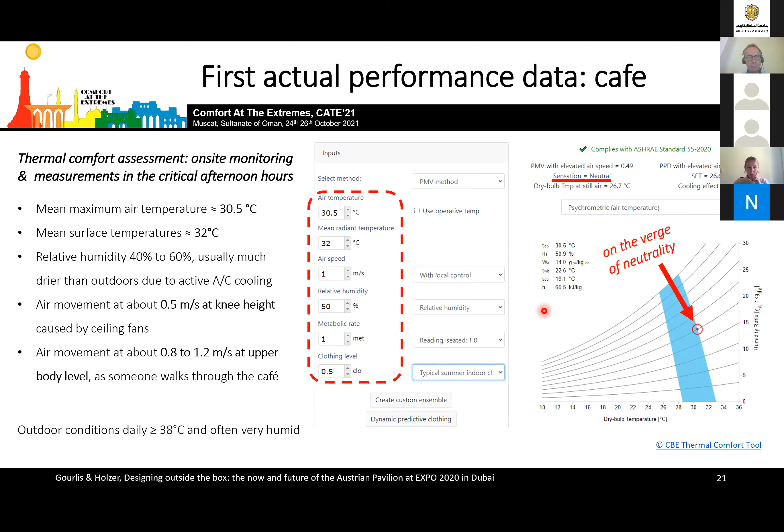What we learned is that what really gave us headaches in the first 2 weeks of operation was not the building itself, but the technical equipment. We thought we had very little technical equipment, but still I could not imagine how many things can go wrong with simple stuff that I thought was normal.

So this has to be fixed. It will be fixed, and it gives us headaches.

There was a learning curve with our clients and with the people who work in the pavilion as regards dress code. We Austrians love to be nicely and fully dressed with shirt and jacket and long trousers and sneakers. The colleagues learned that they sweat like hell when they dress like this in a climate of free running mode, adaptive comfort. So they changed dress code, and that was important.

And we learned that for Europeans, acclimatization takes place within 2 weeks. So in the beginning, they said this is horror. After 1 week, it was nice.

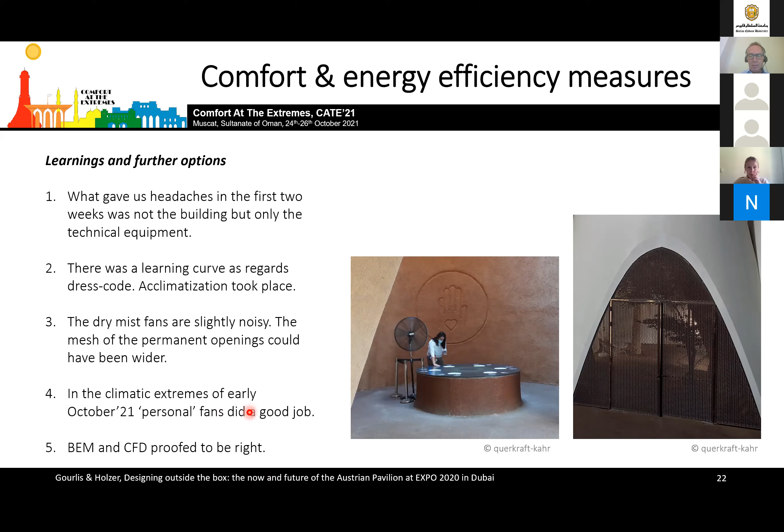We're very happy that the building energy modeling and the CFD proved to be really right. So if you ask the right questions and do the right inputs, these are really things that work.

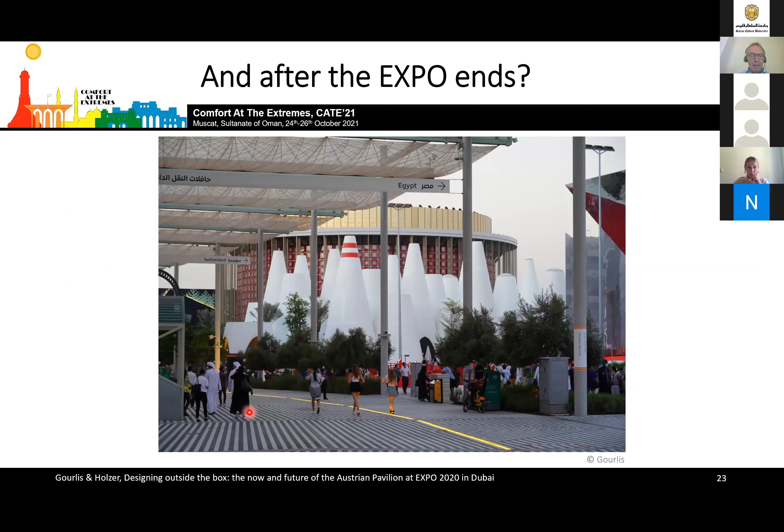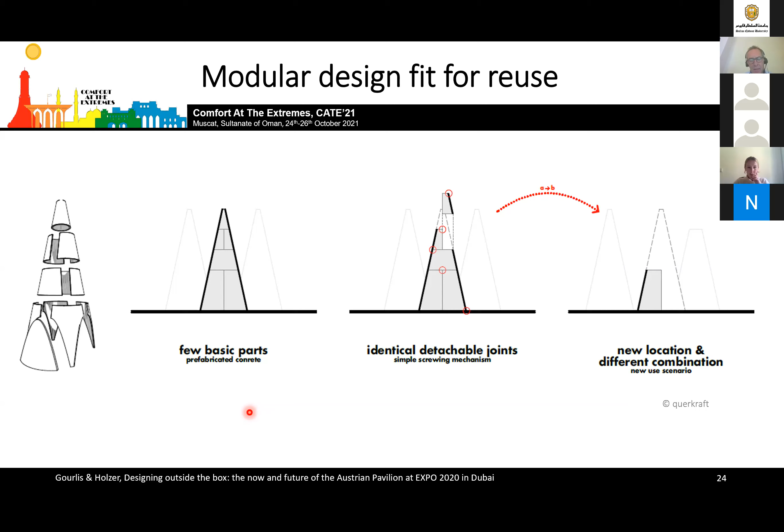After the Expo, in half a year, there are good plans. There are negotiations with Professor... Thank you very much. We have a good offer from German University of Technology in Oman that we might bring them our pavilion and re-erect it on their campus. We would be very happy and honored to do this. And just two days ago, even the Expo managers asked us if the pavilion couldn't stay there because it's so nice and so special.

So we're very proud to say that the pavilion really makes people look at it, and it works. I do hope it's an example that makes a difference.

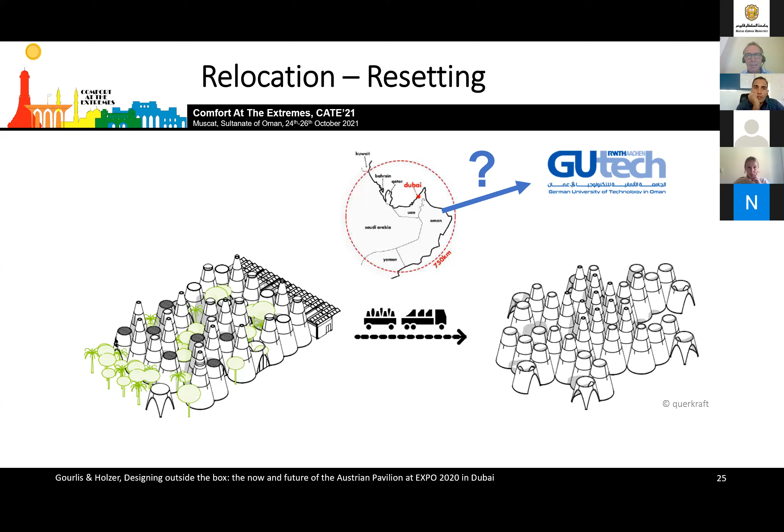Thank you, Peter, for your excellent presentations. I'm not in your field, but about the CFD, computational fluid dynamics, and the utilizing, you need to be sure your CFD works well based on the data you already measured from some sensors inside the buildings you created. But it's excellent work, and congratulations, by the way. So we have 15 minutes.